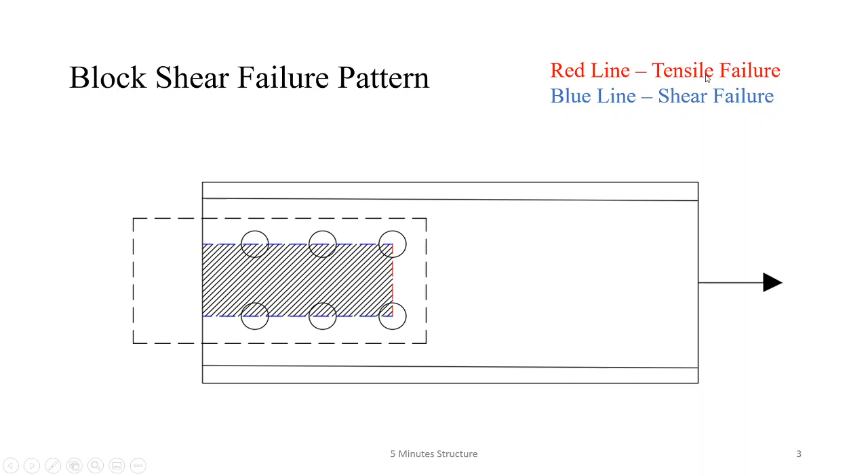Now this is another kind of figure, a coped beam. The cope is connected with a plate in this configuration, here is the applied load, and here is the block shear failure pattern. The blue line is parallel to the load and follows the shear failure, and the red line is perpendicular to the applied load, meaning there will be tensile failure.

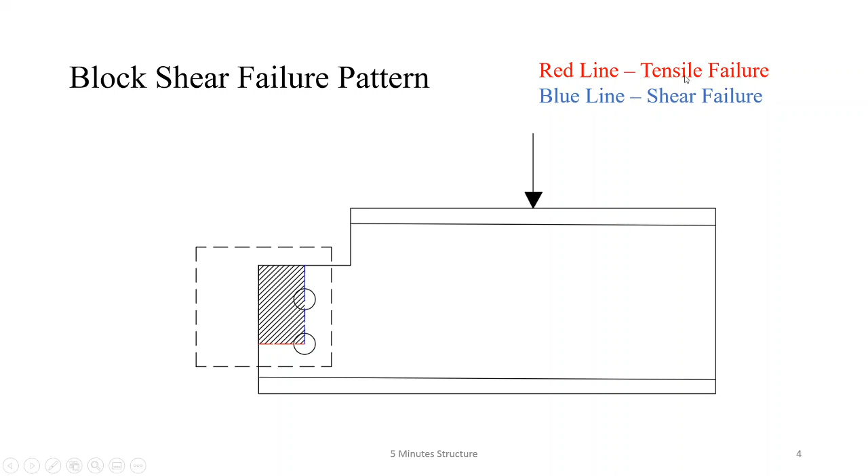As I told you before, block shear failure will happen if tension and shear failure occur simultaneously. The tensile resistance for block shear failure follows this equation. The red portion comes from the tensile resistance and the blue portion comes from the shear resistance. The resistance factor at ultimate will be 0.75.

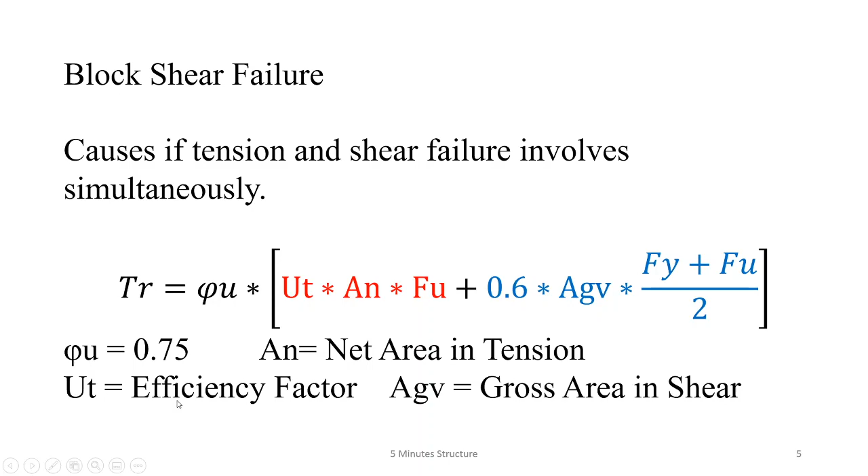An represents the net area in tension, Agv represents the gross area in shear, and the last is Ut, the efficiency factor. This is a new term in my tutorial, so let's see how we can calculate the efficiency factor. You will get it from the CISC handbook, page 2-53, figure 2-26.

You see different types of block shear failure patterns you can find in your structural member, and here we see 13 types of combinations. You have to find out which pattern is followed in your exercise, and then you will get the value of Ut from here. This is a 2-dimensional and this is a 3-dimensional block shear failure pattern, and this is the equation.

Now I'll show you a simple exercise in this tutorial, and I'll show you a more advanced exercise for block shear failure resistance later. A W-shaped member is connected with a plate. The load is applied along this direction, the blue line will be the shear failure, and the red line will be the tensile failure.

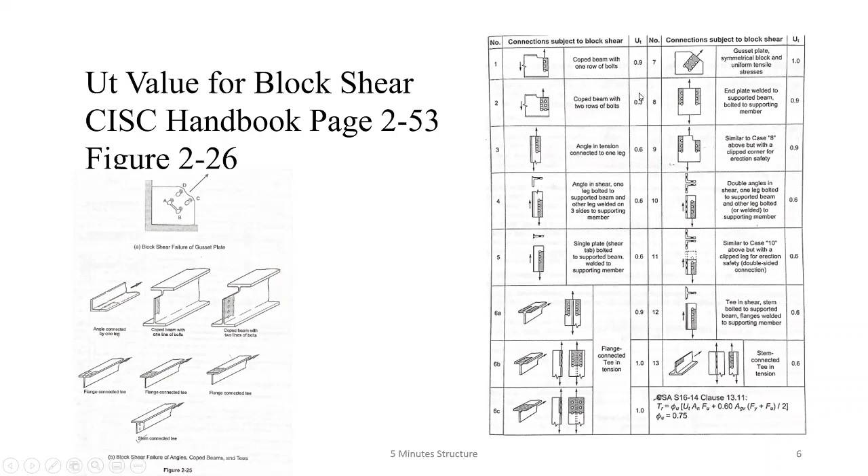For this type of configuration, we find the similarity with number 7, where the Ut value is 1; a symmetrical block shear failure pattern is followed here. The end distance is 40 millimeters. As I told you before, the end distance is from the center of the hole to the outer edge along the direction of the applied load.

Center to center spacing of the holes is 80 millimeters. Hole diameter, let's say 22 millimeters, and the condition is drilled. The beam is W460x106. The thickness of the web is 12.6 millimeters from the CISC handbook. And let's say the material is 350W.

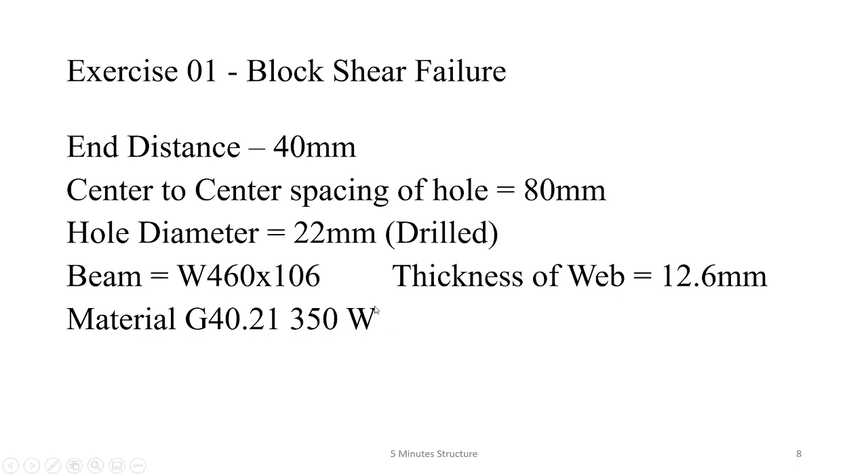Now the Ut value is 1, as I told you before. How can you calculate An? An is the net area for the tensile portion, so from this red line you have to find the net area. You see, just 1/2 of the hole is considered here and 1/2 here, so half of the hole and half of the hole will be considered and deducted from the 80.

It's the drilled condition, so we'll consider 2 millimeters additional, and overall times the thickness of the beam web. So this is 705.6 square millimeters. Now Agv, that is the gross shear area. There are 2 lines here.

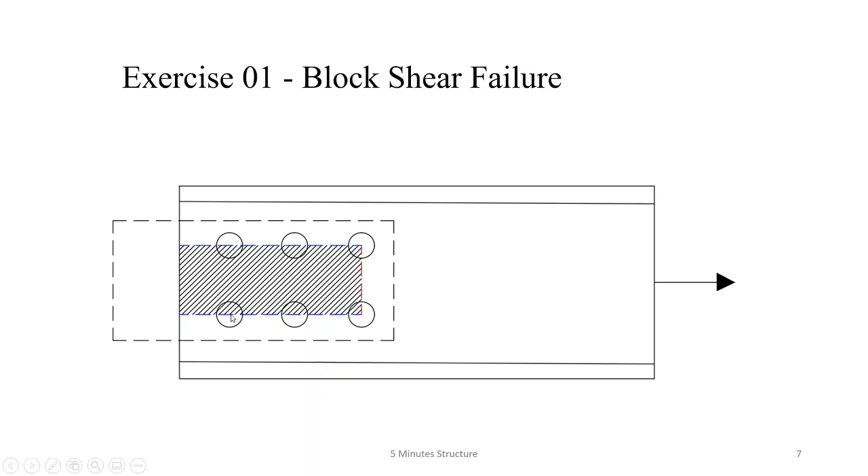Let's say center of hole to center of hole is 80 millimeters, plus 40 millimeters, and we have 2 blue lines. So 40 plus 80 times 2, times 12.6, the thickness of the beam web, times 2. This 2 comes from the 2 blue lines. If there is 1 shear line, then you will consider just 1. That gives you 5040 square millimeters.

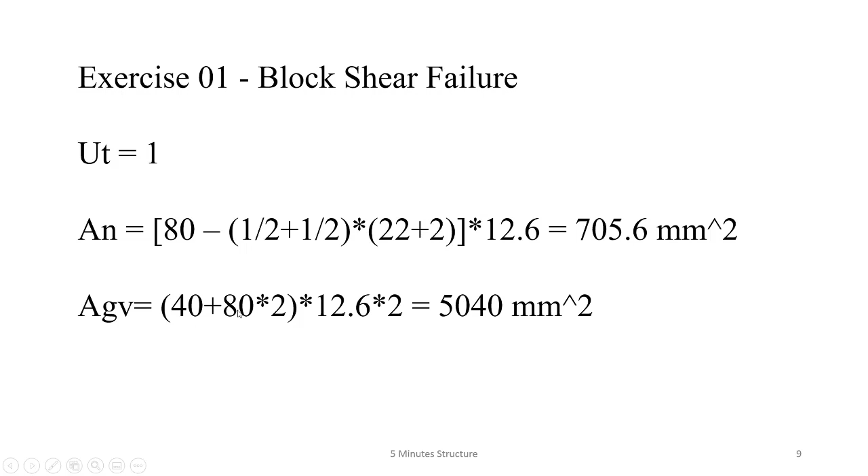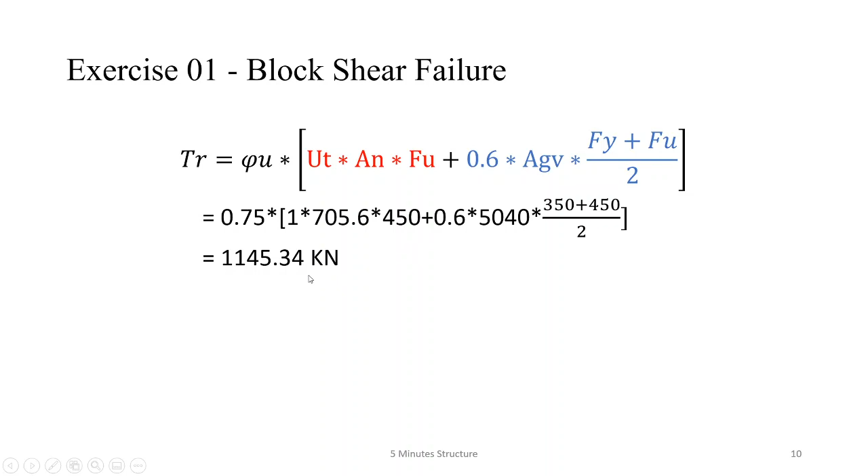Now if I put all the values in this equation, I get the tensile resistance for the block shear failure pattern as 1145.34 kilonewtons. You will get the value in Newtons, divide that by 1000, and get the value in kilonewtons. So that's it for today.